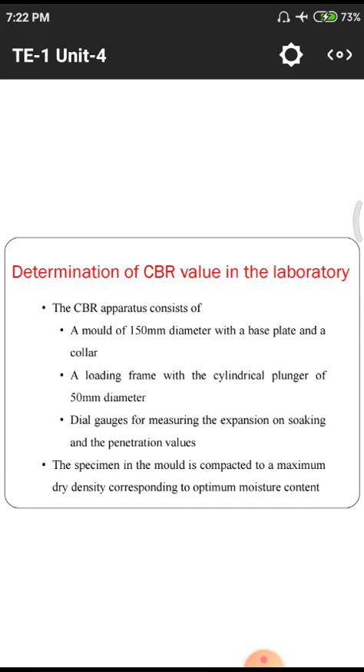First of all we need an CBR testing machine. In this particular testing machine, we are having some quantities of methods. First of all we need to have the CBR testing machine like this.

First we have this proving ring. After that we need to use two dial gauges. One dial gauge will directly give the load penetration values. Another dial gauge will directly give the settlement values. By observing those two things we need to calculate the data.

First of all we have to take the soil sample from the field in a 150 diameter mold apparatus, which is hollow in shape, meaning rounded and circular. In that particular circular mold we are having a 150 diameter.

150 diameter means from one edge to another edge there is a distance of 15 centimeters. So that is the 150 diameter circular plate like this. On the bottom side we have to keep one plate without losing any material from the circular mold.

After that we need to gather these things in the laboratory, and we need to set this apparatus like this.

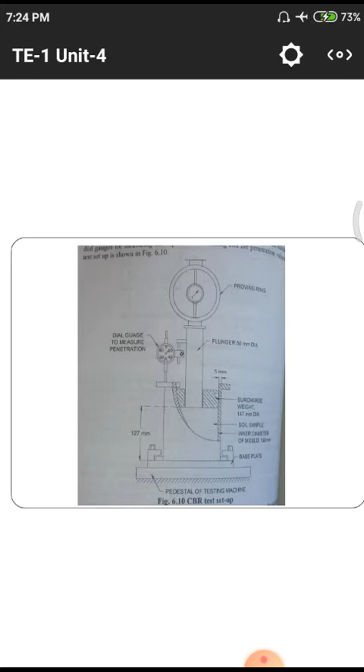First of all, how we need to do this CBR test in the laboratory—there is a step by step procedure. We need to understand this with the help of the previously shown diagram, where we have two dial gauges, and the bottom plate has anchors. I will explain one by one, show the diagram, and you have to observe and remember these.

First of all, the CBR apparatus consists of a mold with 150 diameter, with a base plate and a collar. Normally the collar is a thing useful for carrying, that is called the collar, with 150 diameter and a base plate.

We need to carry the base plate separately. After the excavation of the material is over, we need to keep the base plate at the bottom, and we pick it up with the help of the collar.

Next, a loading frame with a cylindrical plunger of 50 diameter. The plunger is useful to give the load on the soil. The plunger directly gives the load to the soil with the help of these solid plates.

As previously explained, the solid plates are used in these experiments to give a direct surcharge load on the soil sample. Next, dial gauges measure the expansion for soaking and the penetration values.

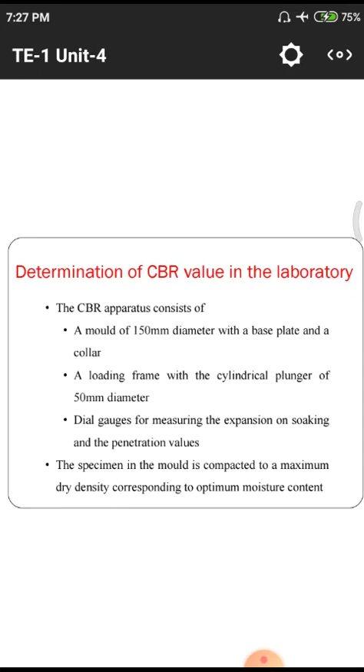Next, IS heavy compaction as per IS 2720 Part 8 is preferred for heavy traffic loads like expressways, national and state highways. Heavy compaction means we need to compact the soil with equipment like the plunger and other rods available in the labs, and use those to compact.

After that, there may be some codal provisions in IS 2720 part 8 which directly give the loads acting on the road surface with respect to quantity of vehicles and type of vehicle. This means every type of vehicle has a different quantity of surcharge load on the soil strata. By using these codal provisions, we take these values so that we can compact the soil in a proper manner.

Next, IS light compaction as per IS 2720 part 7 is used for low traffic roads. Previously we used IS 2720 part 8 for roads like expressways, national highways and state highways. If we are constructing a national highway or expressway, we need to use part 8. For normal load, low traffic conditions, we use part 7, IS 2720 part 7, and compact as prescribed in this part.

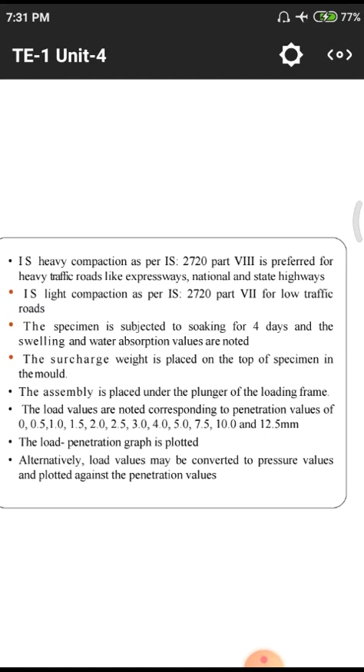Next, the assembly is placed under the plunger in the loading frame. In this diagram we have a loading frame, meaning we give the surcharge weight and surcharge load, and we need to apply some quantity of loading with respect to this plunger.

The assembly is placed under the plunger with a uniform loading frame. The load values are noted corresponding to penetrations starting from 0 - this is the starting stage of our experiment. We note the value in the dial gauge at 0, then after 0.5 mm, then for each 0.5 mm fraction - 0, 0.5, 1, 1.5, and so on up to 12.5 millimeters - we take the respective values in the dial gauge, observing the amount of penetration, and note it down on paper.

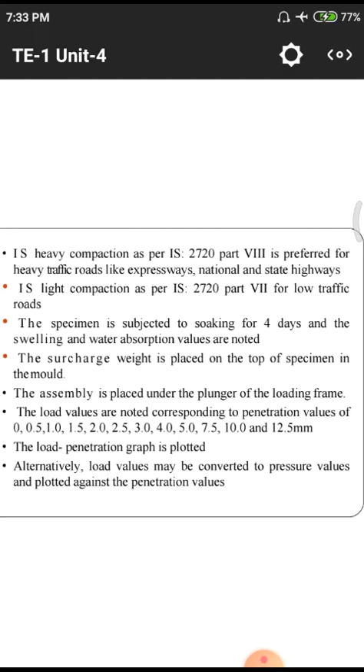The CBR test value is calculated by a relation: CBR percentage equals load pressure sustained by the specimen at 2.5 or 5mm penetration divided by the load pressure sustained by standard aggregate at the corresponding penetration level, into 100. That means we need to compare. Whatever soil we have taken, for that soil we are having some quantities of penetration values in the graph. Those values we need to observe with a standard aggregate. Standard aggregate means, as we discussed previously, the IS standards 2720 Part 8 and Part 7. We have standard aggregate penetration values, so the soil values we need to compare with the standard aggregates, and we need to calculate the CBR percentage, that is, the California Bearing Ratio percentage.

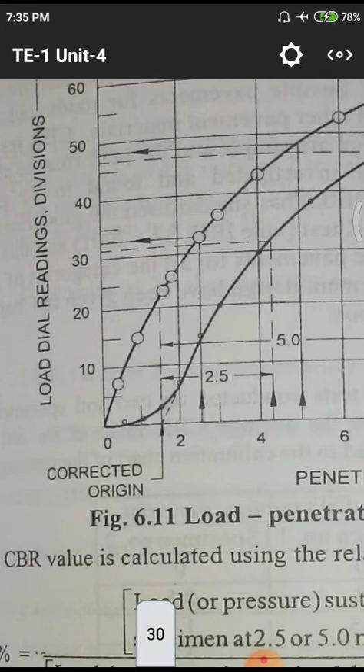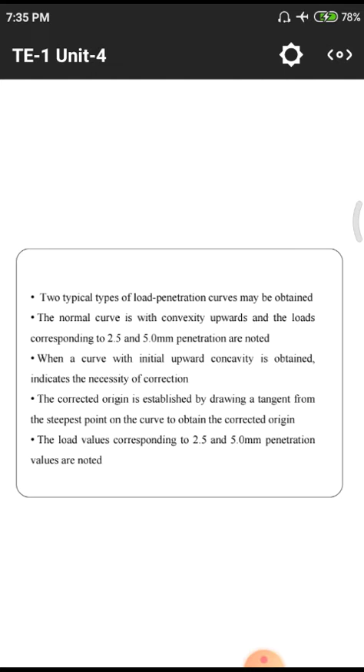Next, two typical types of load penetration curves may be plotted and obtained. The normal curve is convex upwards, and the loads corresponding to 2.5mm and 5mm penetrations are noted. In this particular diagram, we are having two typical curves: specimen number 2 requiring correction, and specimen number 1 no correction. In this test, two specimens are taken, and for those two specimens they collect the data and plot the graphs.

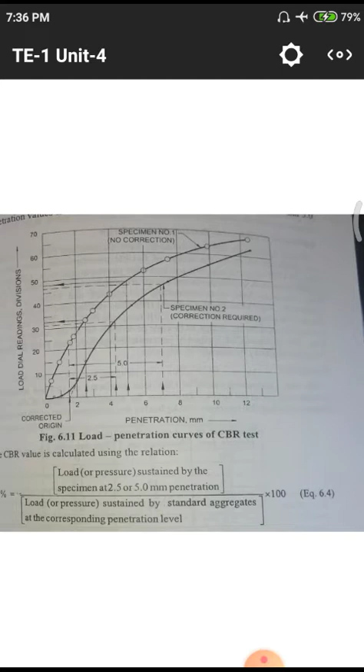In this diagram we see 2.5mm and 5mm penetrations. For 2.5mm penetration, what is the value? The value is around 32. After 5mm penetration, the value is around 49 or 48. So they need to compare those two things with respect to a standard aggregate value. That is what they are telling.

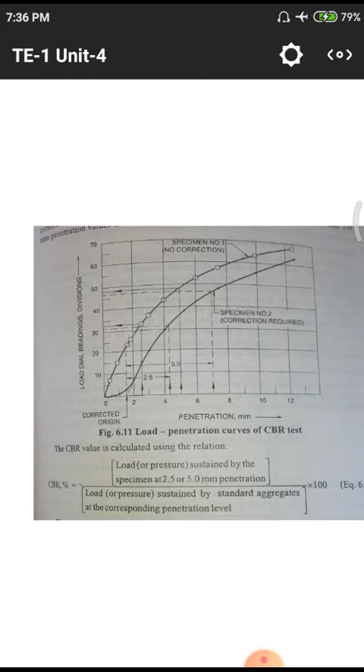After that, when a curve with initial upward concavity is obtained, it indicates the necessity of correction. That means a curve with initial upward concave versus convex nature. In the second one, we have initial upward concave, that is, it's not gradually increasing but suddenly convex in nature. So those things we need to observe from the graphs.

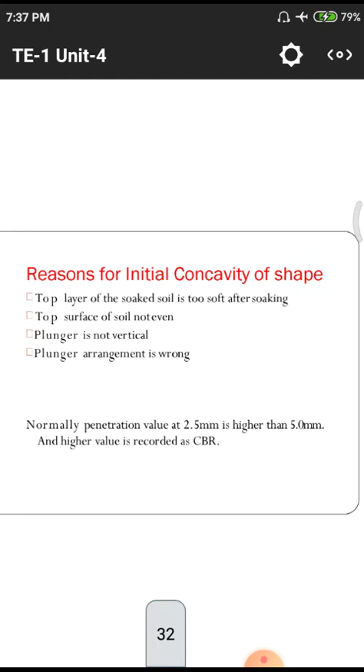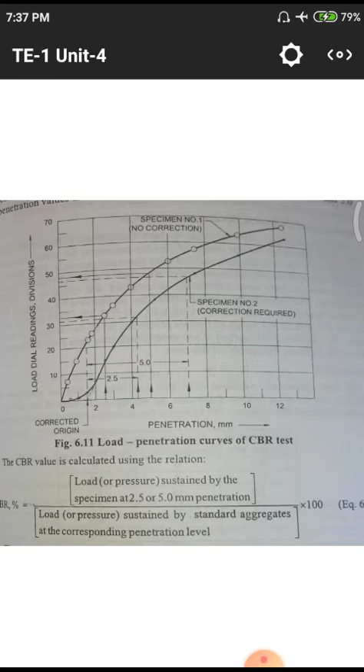The load values corresponding to 2.5 and 5mm penetrations are noted from those two graphs. What are the reasons for the initial concavity shape? In this diagram, the first curve is normally a straight line, but in the case of the second line, initial concavity is obtained in this particular portion. So we have to observe what are the reasons behind this initial concavity, and we need to correct for those.

There may be four reasons. First, the top layer of the soaked soil is too soft after soaking. That means for the total quantity of soil taken, the top layer will absorb too much water. That is also one of the reasons. Normally the total amount of soil should absorb a particular quantity of water, but instead only a few layers absorb the water while the remaining layers do not. That is also one of the reasons.

The next reason is that the top surface of the soil is not even. That means we need to compact the total soil strata with regular patterns, otherwise there may be voids present or some uneven nature. So we need to give equal amounts of blows to prevent voids. The total soil surface not being even means there is irregularity. Odd means irregularities are there; even means the total soil is in the same position, like parallel lines.

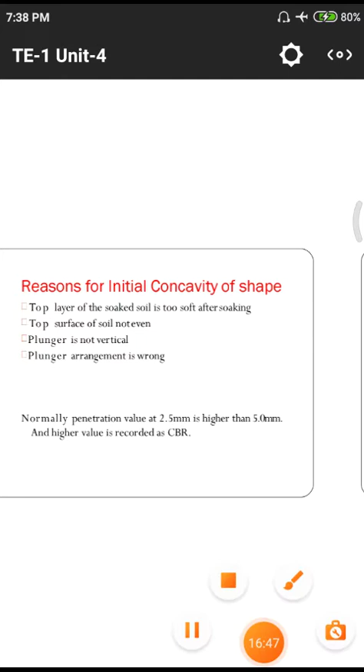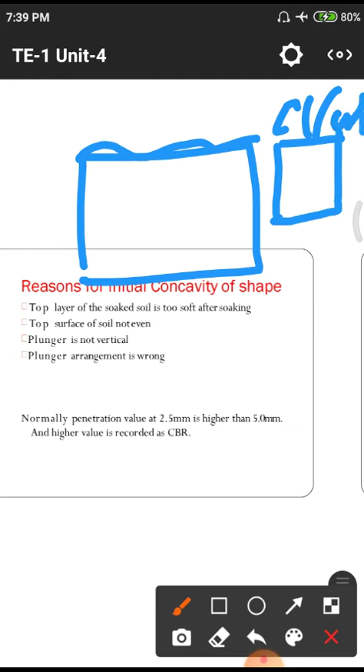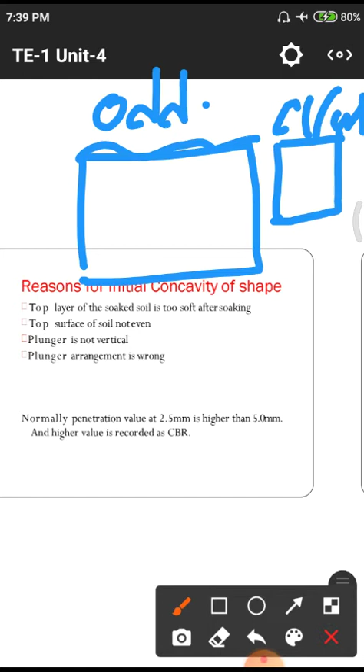The next reason is the plunger is not vertical. If the plunger has some quantity of inclination... Normally, if the soil sample surface is not even, meaning there are irregularities rather than a straight line, we call this uneven nature. If you get an uneven condition, automatically there may be a sudden dropping of the curve. If the condition is even, the load will be applied to the total layer in an equal manner, so we get a curve in a straight line like the first one. After that, the plunger is not vertical.

Vertical means simply it is a particular soil sample. For that particular sample, we will have one dial gauge and simply a plunger.

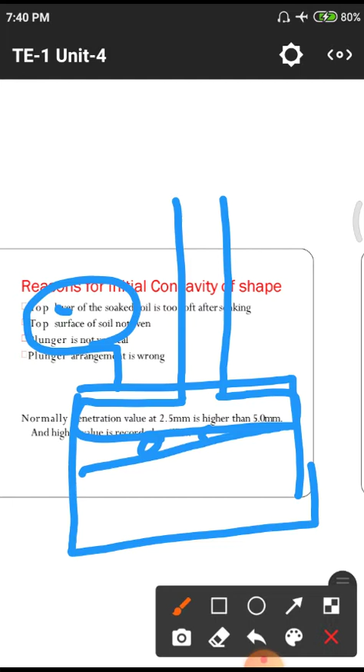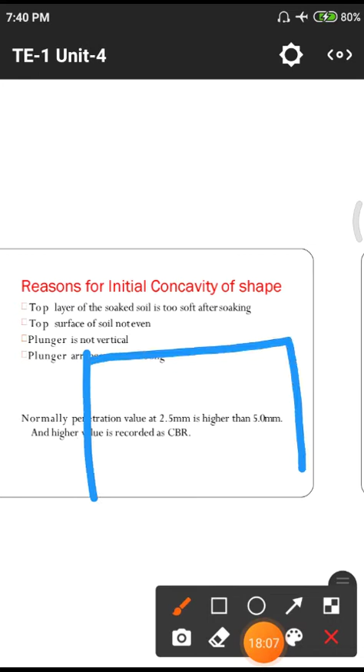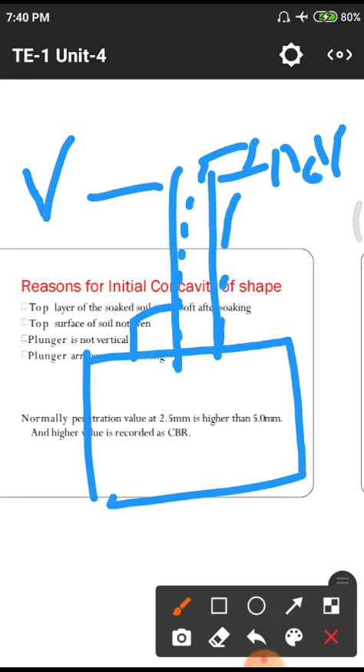There may be some quantity of angle, so that it is irregular. Plunger is not vertical. Another case is the plunger is not vertical, meaning it is normally vertical at 90 degrees. If it is not vertical, automatically there may be some extra quantities. This is the non-vertical condition, and this is the vertical condition. NV means non-vertical, V means vertical. This is also one of the reasons.

Next one, plunger arrangement is wrong. If you arrange the plunger in an irregular manner, automatically there may be no proper connection of the plunger to the dial gauges. Those also lead to some quantity of wrong values. These are the four main reasons for obtaining an uneven curve or concavity in the shape.

Normally, penetration value for 2.5 mm and 5 mm we will take. For those two values we have to check with the normal aggregate values, and we need to compare the CBR percentage.

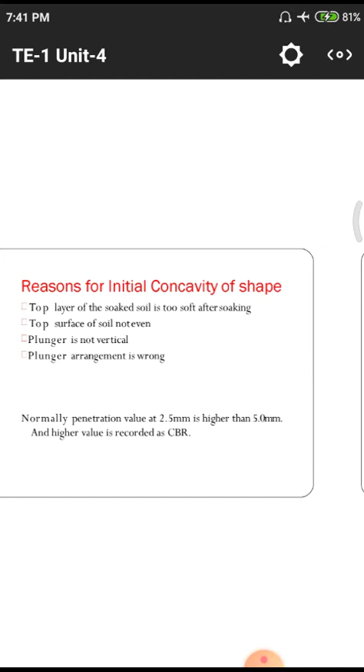Next one we are having is the plate bearing test. Once again I will explain the CBR test.

In this particular CBR test, first of all we need to soak the sample in water, that means soak down the sample for 4 days. After the soaking is over, we need to drain the sample and use it for this calculation purpose. Once done, we have to fix the 150 mm arrangement.

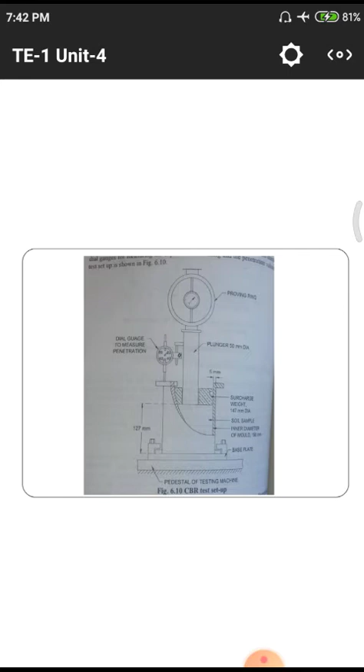A 150 mm circular disc is there, automatically arranged to the base plate. The circular base plate, we need to arrange those with the base plate. After the arrangement is over, we need to give some amount of surcharge weight on the soil.

After the surcharge weight is induced on the soil, we need to note down the dial gauge reading, and after that dial gauge reading is noted down, we need to give a plunger also with dial gauge reading, so that those two things we have to observe.

After a uniform load is maintained with respect to 1.25 mm per minute, those things also we need to observe. And for each 0.5 mm penetration, we need to note down the values.

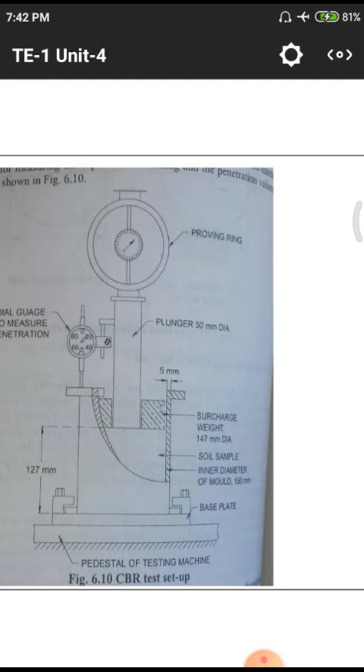First of all, initially at zero condition, what is the penetration value? After 0.5 mm penetration, what is the value? All those things up to 10 to 15 mm we need to collect, and we need to take down average values for 2.5 mm and 5 mm samples.

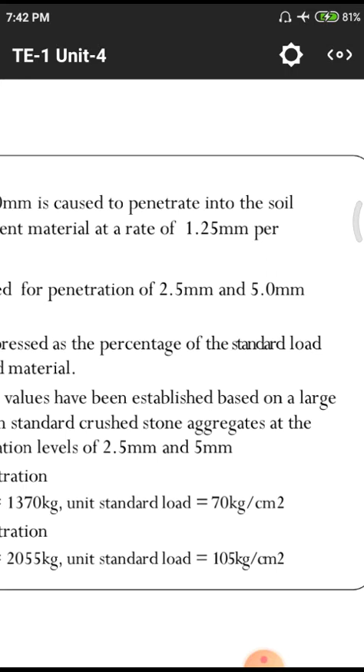Okay, those things we need to measure with the help of these graphs. After the graph is over, we need to compare with a standard aggregate value. We will get the percentage.

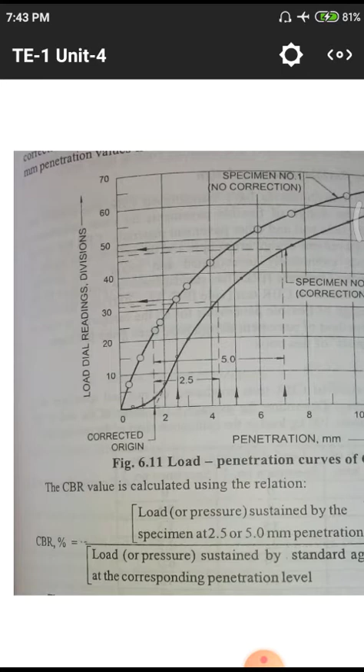CBR percentage equals load sustained by 2.5 mm and 5 mm penetration, divided by normal load pressure corresponding to the aggregate value, into 100.

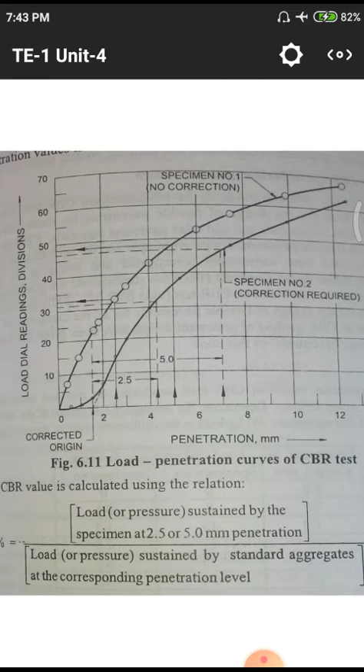First of all, we need to do this CBR test for normal aggregate and soil sample, so that we need to choose those two values and compare. First of all, soil value by aggregate value into 100 directly gives the percentage of CBR value.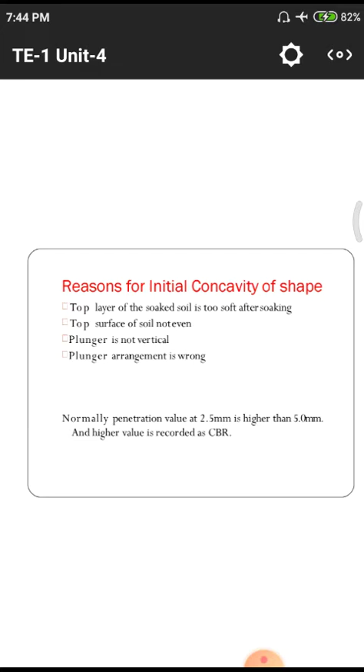These are the reasons. First of all, what are the main four reasons? The top layer is too soft after soaking, and second one is the surface is irregular. Third one is the plunger is not vertical. Next one, the entire plunger arrangement is wrong. These four are the reasons for not obtaining a uniform, concavity curve.

Next one, plate bearing test. What is the plate bearing test? What is the equipment normally we are using?

Okay, this is the plate bearing test we are using in the field, so that we are using some quantity of hydraulic jacks with dial gauges. It is a typical arrangement of the plate load test on the soil field itself.

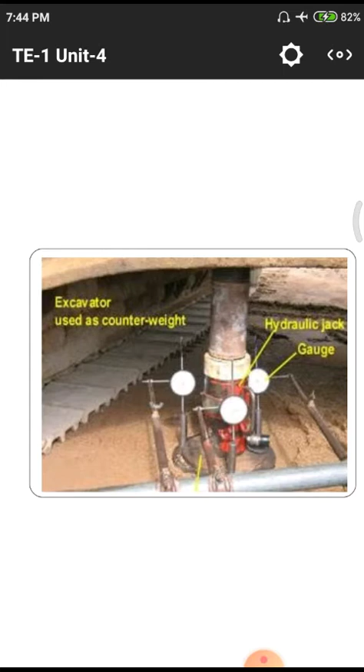For plate bearing test, it is also called as plate load test. Plate bearing test is used to evaluate the supporting power of subgrade in situ for the use of pavement design, by using relatively larger diameter plates. Larger diameter means a huge amount of diameter of steel plates are used to calculate these plate load tests.

The test setup consists of a set of plates of 750, 600, 450 and 300 mm diameter. Diameter means normally the radius r equals d by 2.

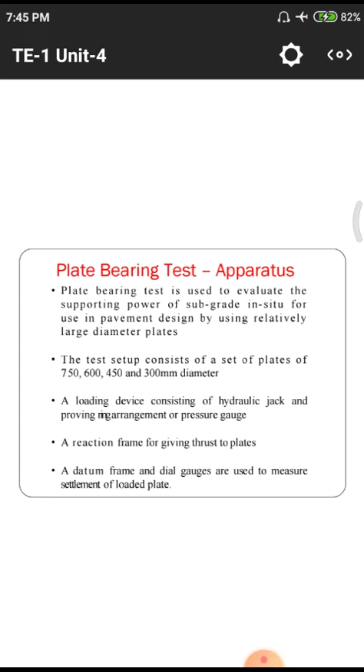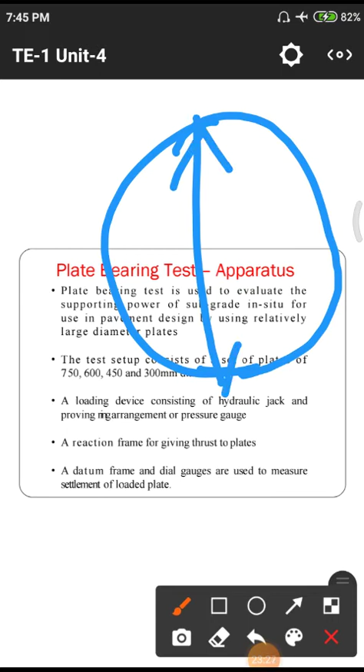The total diameter is equal to 750 mm. I will draw this, the particular diameter of the plate. This is the d value, so this d value varies from 300 to 750.

Normally the initial minimum value is 300. After that 450, 600, and 750. The difference between those values is 150 mm throughout - from 300 to 450, 450 to 600, and 600 to 750.

So there is a uniform difference of 150 mm between those diameters of plates. The first initial value is 300, and the maximum we are using is 750 mm.

The loading device consists of a hydraulic jack and proving ring arrangement or pressure gauges. There is a reaction frame for giving thrust on the plates. The datum frame and dial gauges are used to measure the settlement of loaded plates.

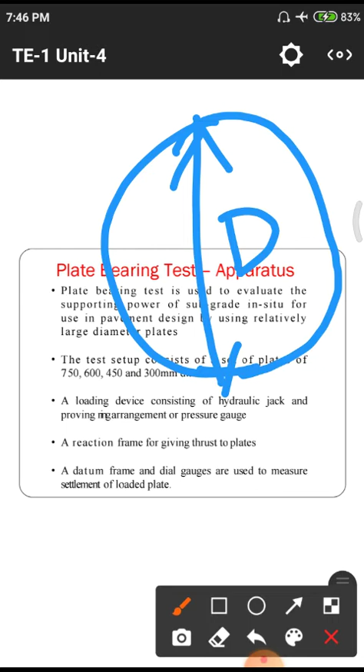The load is given on the particular solid steel plates of diameter 300 to 750, so we increase the load and note the dial gauge readings of penetration. In this diagram, at the top level we have the particular steel plate, so there may be some decrement of this height.

Those heights will be monitored by using these dial gauges. We need to note down the procedure - that means we need to understand what the procedure is.

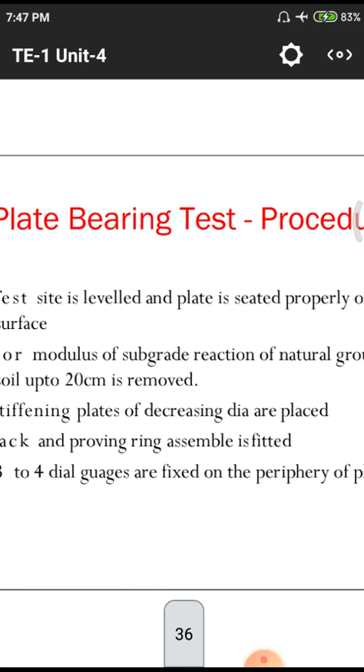First of all, the test site is leveled and the plate is seated properly on the surface. In the bottom land we need to take these measurements - whenever we go to a particular site, the total site level needs to be flattened, meaning there are no irregularities on the soil sample.

The total site should be in an even position, and we need to apply the plate on this even position. That means we need to keep the plate only on even surfaces. If we keep the plate on uneven surfaces, the total values will give wrong readings, so we need to observe the surface with proper precautions.

Next, for the modulus of subgrade reaction, the natural ground soil up to 20 centimeters is removed. This is because there may be some organic matter or irregularities, and voids in the total surface. So we need to remove the top layer of the surface up to 20 centimeters depth, and after that flatten the surface.

Stiffening plates of decreasing diameter are placed. That means in the initial condition we need to place the huge diameter plate of 750 mm, then 600, then 450, then 300 - we arrange the plates in order.

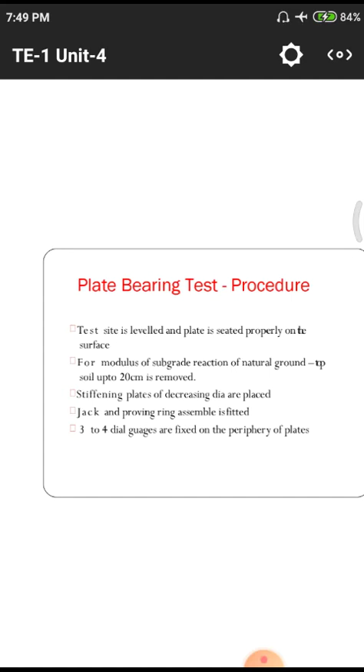A pressure of 0.07 kg per centimeter square, which is 320 kgs for the 75 centimeter diameter plate, is maintained on the plate itself, applying and removing after a few seconds. Dial readings are noted corresponding to zero load. Load is applied by means of a jack to cause a settlement of 0.25.

When there is no increase in settlement, when the rate is less than 0.025 mm per minute, the load dial readings and settling readings are noted down, and average values are considered. The next load will be increased, so settlement will be 0.25 mm, etc. This way the experiment is repeated up to 1.75 or more.

In total, this simply means we take a plate load test by increasing the load with the help of the jack. That means the jack gives some quantity of load on the plate, so we increase the loads and calculate the dial gauges, because the dial gauge directly gives the penetration values.

First, we need to take some quantity of plates. For each plate, we need to fix these dial gauges. After the fixing is over, we need to give a pressure with respect to 0.07 kg per centimeter square, and that quantity of pressure will be given for each minute.

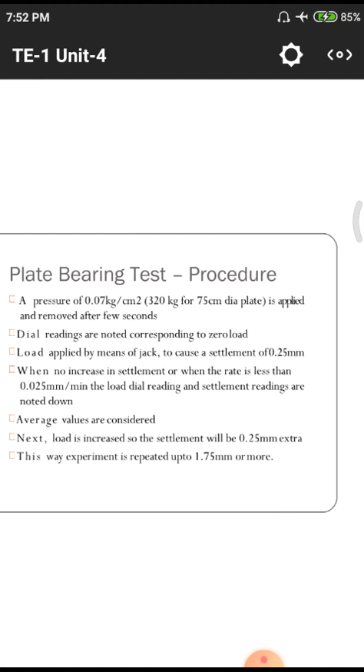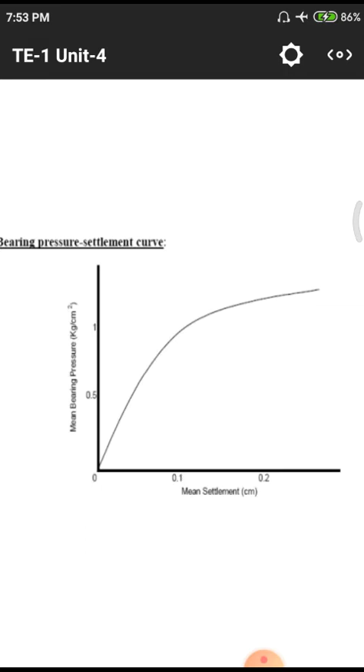This is the graph. On the bottom we have mean settlement: 0, 0.1, 0.2, and so on. On the other side, we have mean bearing pressure: 0, 0.5, 1, and so on. We need to plot the values in the particular graphical stream, and we will get the graph likely shown.

What are the things we will get after plotting the graph? The modulus of subgrade reaction is the known reaction pressure sustained by the soil sample under a rigid plate of standard diameter, per unit settlement, measured at a specified pressure of settlement.

IRC, that means Indian Road Congress, specifies the value of K measured at 0.125 settlement. K equals P by 0.125 kg per centimeter square, where P is the load and K is the factor.

If you are having any quantity of doubt, I am simply explaining the procedure. If you do it in a manual, automatically you will have a clear cut idea. Those experiments will be done in our 3-2 semester.

Allowance for worst subgrade moisture: that means worst subgrade means if the moisture is very high, automatically we will get worst values. K value will be lowest at soaked conditions. Soaking means if there is any water content on the field, automatically K value will be very lowest.

Next, moisture content during the test may seldom represent worst conditions at the site. If you are doing the test on the particular soil sample, there will be no moisture on the soil, because if there is moisture, we are using this huge amount of equipment.

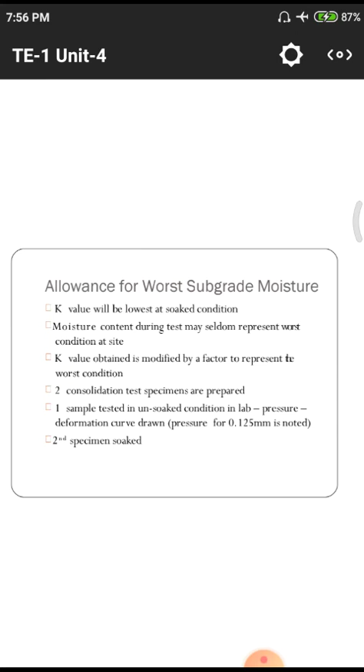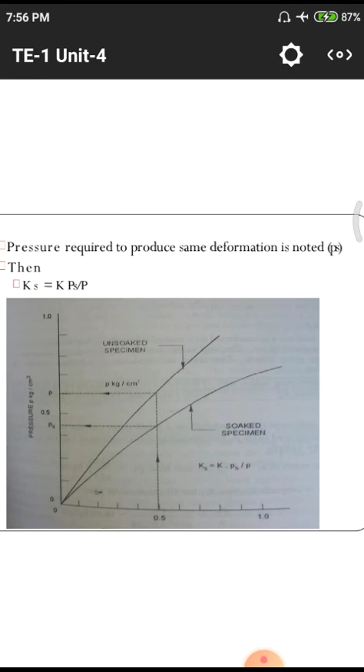Ks is equal to K into Ps by P. Pressure required to produce the same deformation is noted as Ps. So Ks equal to K into Ps by P, where they directly mention the Ps value and P value.

In that particular sample we have two conditions: the soaked specimen and the unsoaked specimen. Soaked means the content has some quantity of water vapor, unsoaked means there is no water vapor. For those two values we get some quantity of deformation with respect to graphs, and we need to observe both.

Initially up to some content the value may be the same, after that there may be some deformations. At 0.5 we need to take down those values for P and Ps, so that we get Ks equal to K into Ps by P, where K is the constant value.

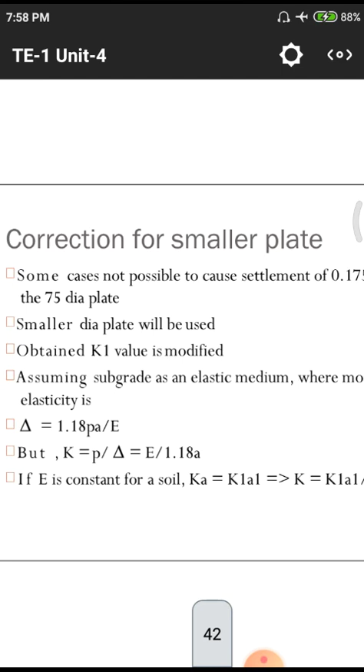What are the corrections for a smaller plate? Some cases make it not possible to cause settlement of 0.175 centimeters for the 75 dia plate, so a smaller diameter plate will be used. In some cases the land has some quantity of stiffness, a huge amount of stiffness.

Due to the stiffness the plate will not be settling, whether soaking or not soaking. That means there is no deformation observed whenever we apply a load on the structure. So we will go for another decreased diameter plate.

That means if previously you were taking a 300 mm or 750 mm diameter plate, we need to decrease the diameter. If 750 is taken and there is no value change, we go to 600, then to 450. Likely we need to decrease the diameter of the plate until a smaller diameter plate works.

The obtained K1 value is modified: delta equal to 1.18 Pa by E, where E equals Young's modulus, but K equal to P by delta. That means P equal to load in kg per centimeter square, and by the delta value we need delta equal to 1.18 by E, so that E by 1.18A we will get.

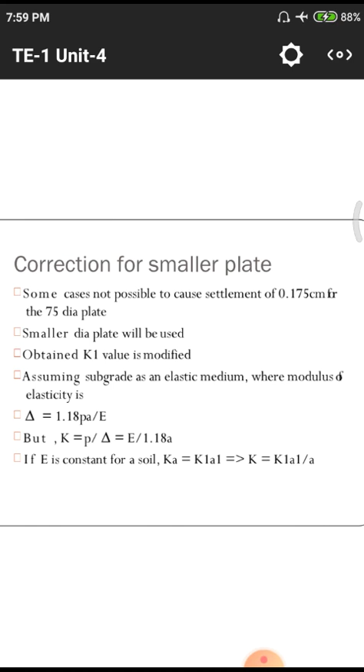First we need to collect the data. In this plate load test we use different diameter plates on the soil surface, and for each plate we use some dial gauges, so we collect 3 to 4 dial gauges with respect to each plate.

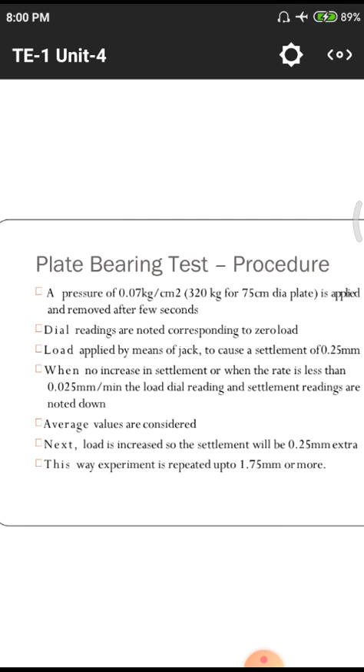This is the normal procedure, the procedure for one value. After that we need to take 2 to 3 collections and find the K value, the constant value for the subgrade, so K equal to load by 0.125. It will give K equal to kg per centimeter square by centimeter.

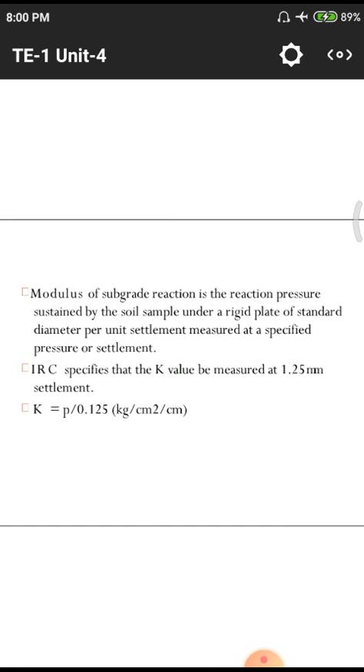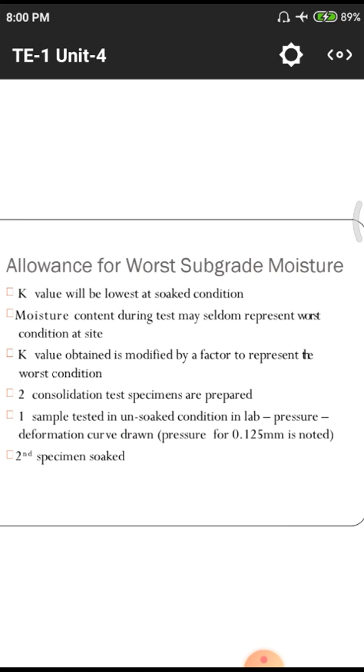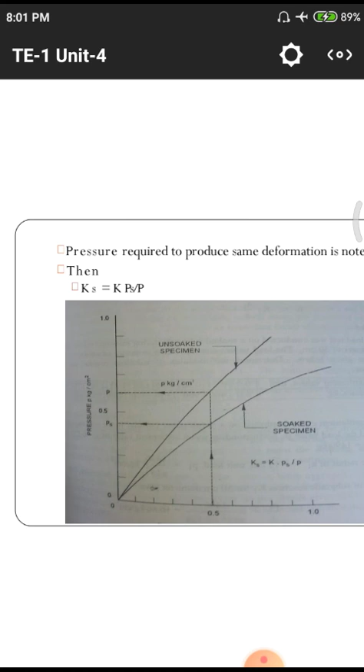If there are any worst conditions in the subgrade we have to go for 2 to 3 values, representing unsoaked and soaked conditions, and compare them. Ks means soaked condition, normal K means unsoaked condition. For those we will get respective loads: Ps means soaked load, P means unsoaked load.

We get these values with respect to delta equal to 1.18 Pa by E, where E is the constant value of the soil, so we calculate the E value using the Ka values and K values.

K into A equal to K1 into A1, so K equal to K1 into A1 by A value. This gives K directly, which we substitute in the equation K equal to P by delta. In this equation we get P by delta equal to E by 1.18A, giving us the E value, which is the constant for the soil, substituting E by 1.18A, where A is the area of the soil.

We apply a load on the soil strata, so we need the area - if it is 750 diameter, we get area as pi by 4 d square. E is the constant divided by 1.18, and A gives a particular constant value, so P by delta gives us the K value.

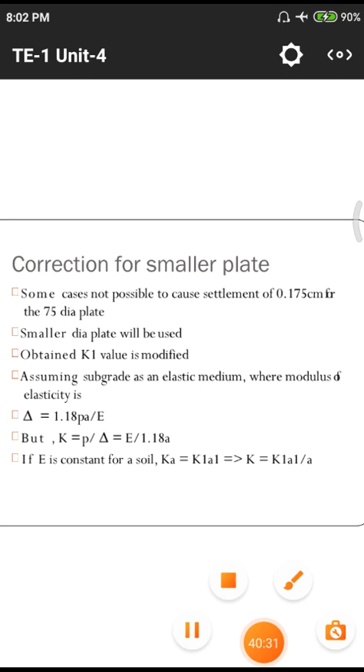This is the total procedure. After this, in the next class we will discuss the aggregates.